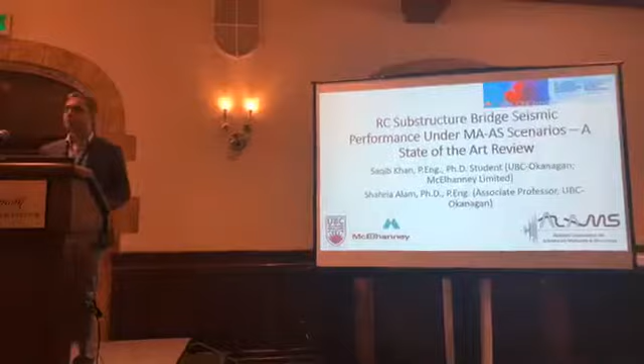Thank you, Dr. Mitchell. My name is Saqib Khan. I'm a PhD student at UBC Okanagan with Dr. Shahria Alam. I'm also the branch manager for McElhanney for Bridges. Dr. Alam is my supervisor, and he's the associate professor at UBC Okanagan.

I'm going to talk a little bit about the effects of main shock, aftershock sequences as they relate to bridges. I'll preface this with a couple of things, because it's a state-of-the-art review, and I had to look at a lot of papers and distill it down. It doesn't carry a lot of detail. I've just tried to stay at a very high level because I only have 15 minutes. So if you are so interested as to look deeply into this, please refer to the paper, and even that will only scratch the surface because I only had 8 pages.

So you really need to go and read more of the papers that are in the reference section. And the other thing is, because of copyright issues, I was not able to put very many figures. So in a way, this is going to be death by PowerPoint, but I've tried to make it as simple as possible. So stay with me. I think I'll touch upon a few things.

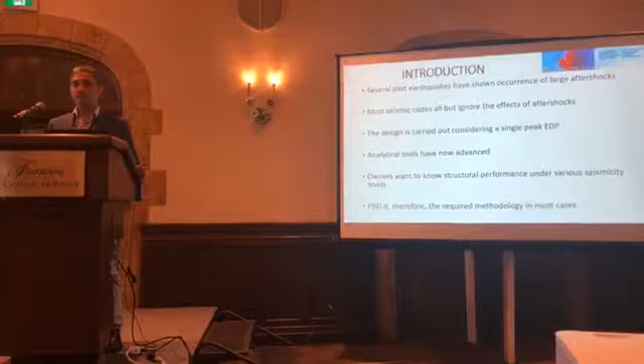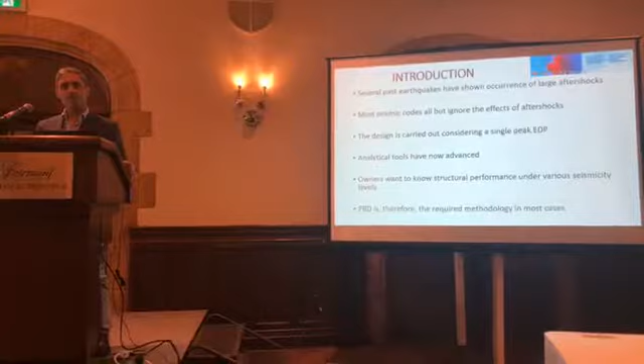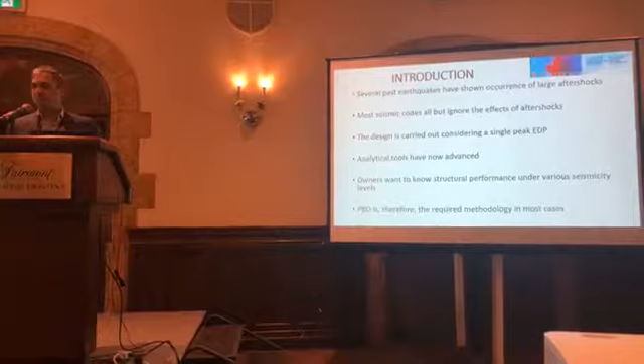Starting here, I think the one thing we all realize is several past earthquakes have had big aftershocks. I think if you were in the keynote, you would have heard about Christchurch and how many aftershocks there were, and it was actually the 6.3 that happened later that brought about a lot of the damage. What happens with most of our seismic codes is they simply ignore the effects of aftershocks, and what we're really doing is designing considering a single peak engineering demand parameter such as spectral acceleration. So that's a bit of a shortcoming.

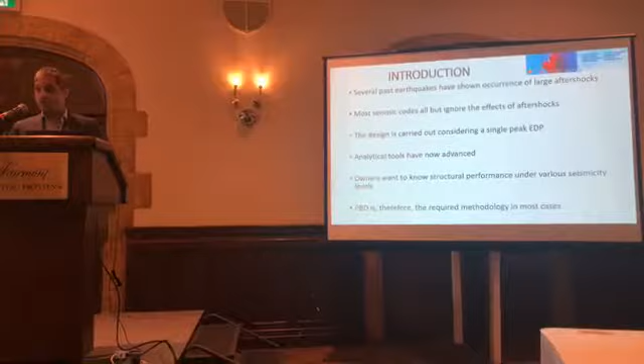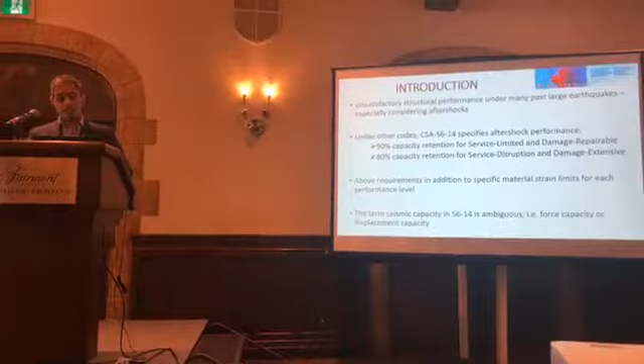However, what's happened is our analytical tools have advanced. Owners now want to know how their structure is going to behave under a single event or multiple events. We do have the performance-based design methodology, which lends itself quite nicely to be able to come up with the performance of a structure, whether it's a single earthquake or multiple earthquakes. So we've had unsatisfactory performance in the large earthquakes in the past.

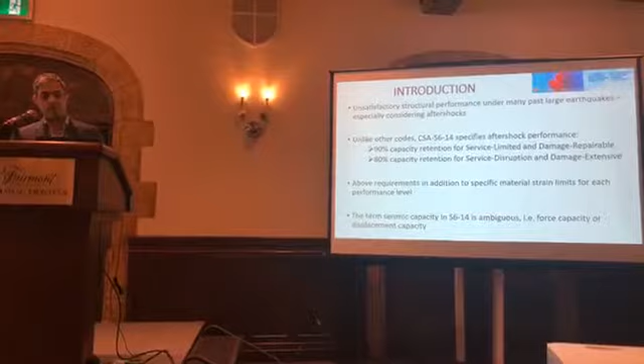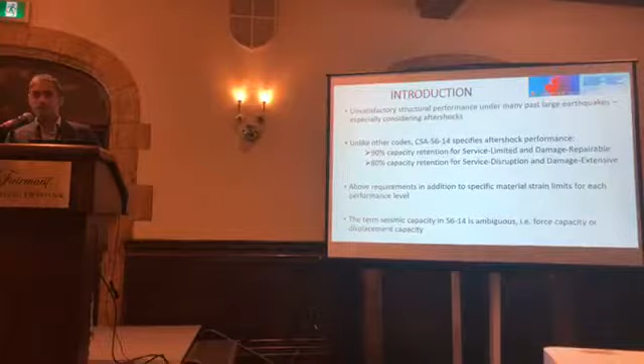S6-14, which is the current Canadian code, does give us a little bit of a flavor as to what it requires for aftershock performance. It basically wants us to retain 90% of the capacity of the structure for limited service and repairable damage performance levels, and 80% for service disruption and extensive damage performance levels. So these requirements are in addition to the material strains for each performance.

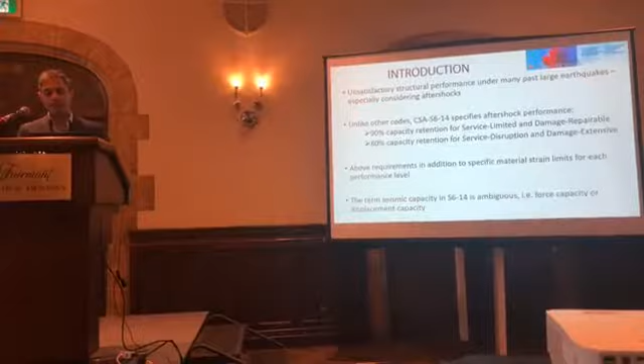The problem is the term seismic capacity is quite ambiguous. Are we talking about force capacity? Are we talking about displacement capacity? A reduction in strength? A reduction in stiffness? What is it that we're trying to retain 90% of or 60% of?

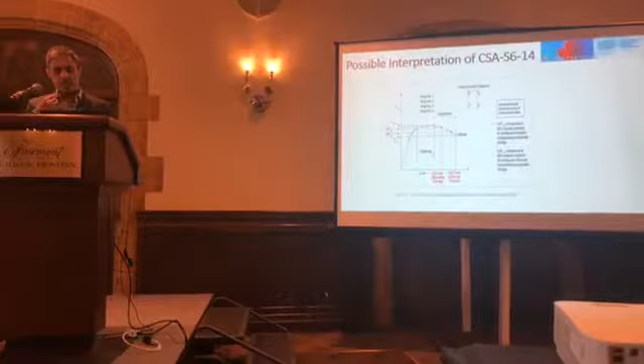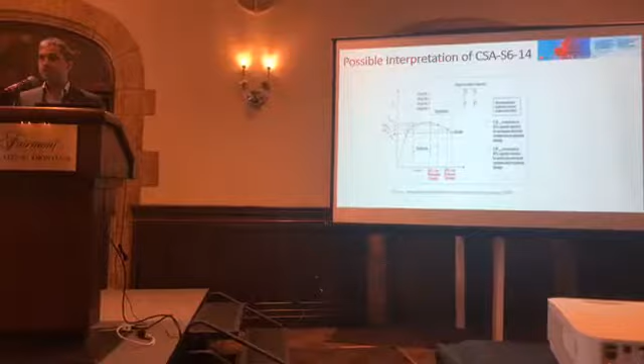That's a bit tricky. So we authored a document for the engineers and geoscientists of British Columbia, which is best practice for doing performance-based design in BC. It's been adopted, and this is one of the possible interpretations that we came up with as part of that. And because I was involved in this work, so I have this picture.

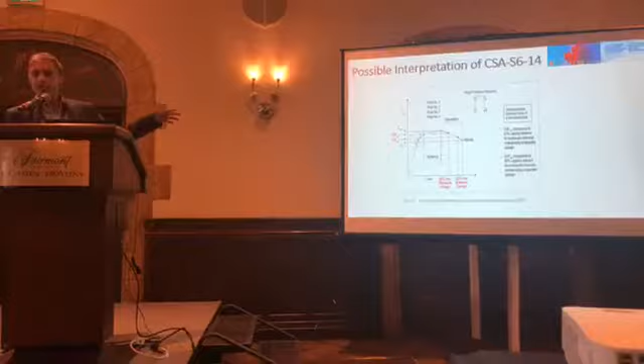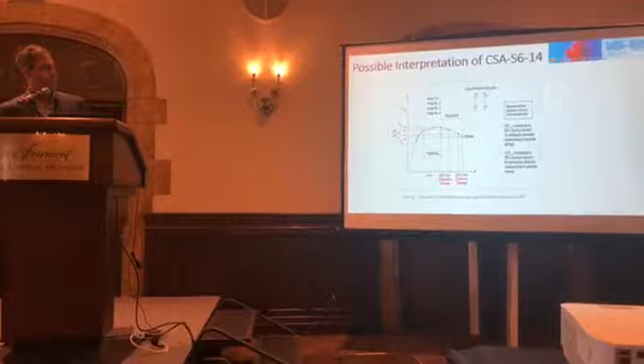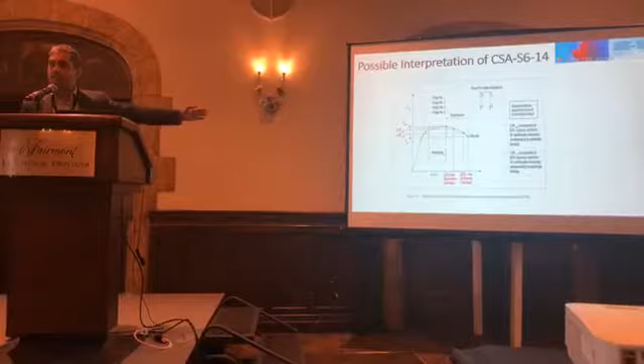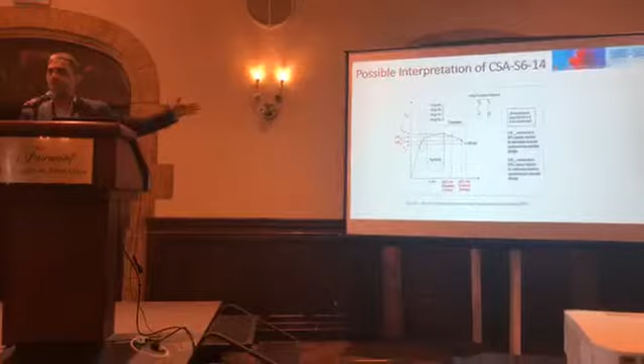So it's basically looking at a notional pushover analysis, accounting for strength degradation, and you basically have a drop off in your force demand, and you can map your displacement on there and see where that displacement occurs when you have 90% of the capacity left or 60% of the capacity left. So that in essence becomes your displacement capacity for each one of those performance points. That's going to be in addition to whatever displacement capacities you get corresponding to the strain values that are in the code. And either those or these points will govern depending on whichever occurs first.

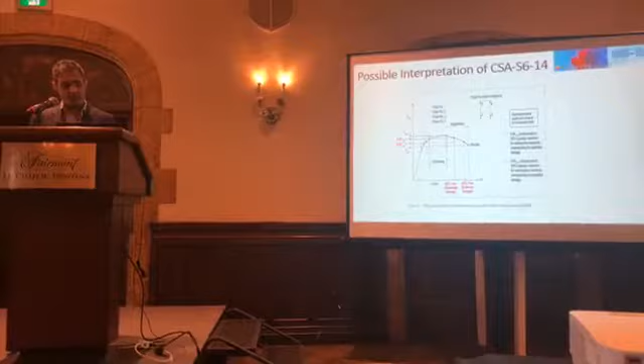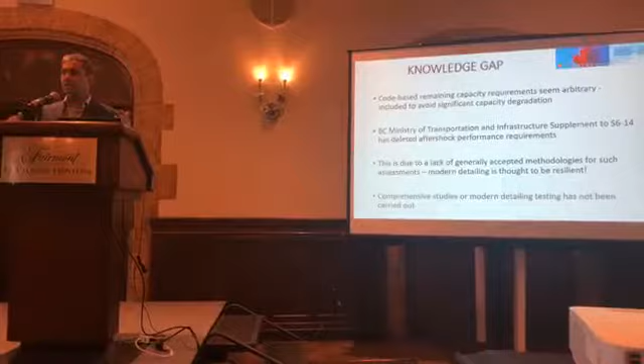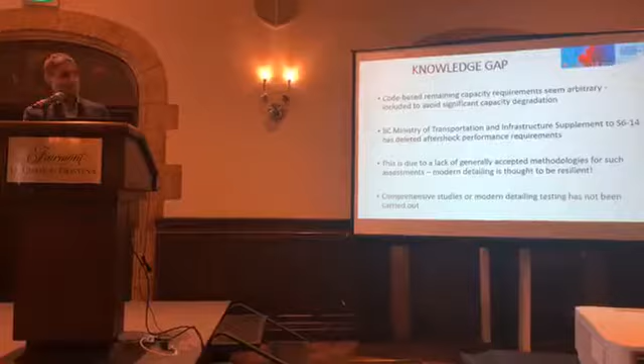So the whole idea here, even though these seem arbitrary, was to basically have some way of keeping some capacity in your system. You don't want to push it so far that an aftershock comes along and the thing goes boom. So the whole idea is to retain some capacity. However, it's ambiguous. We then looked at the S6-14 supplement for the Ministry of Transportation.

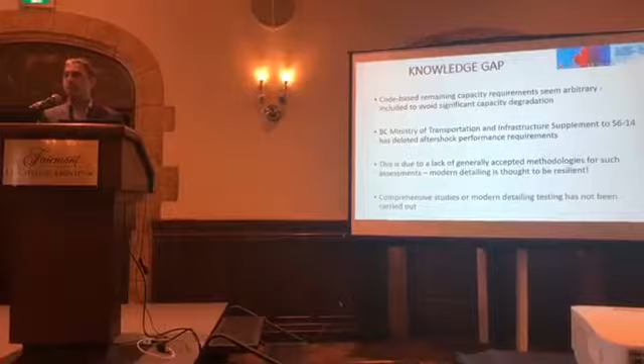I was involved with that a little bit, and we decided to get rid of that whole thing, simply because there are no agreed upon methodologies at this point.

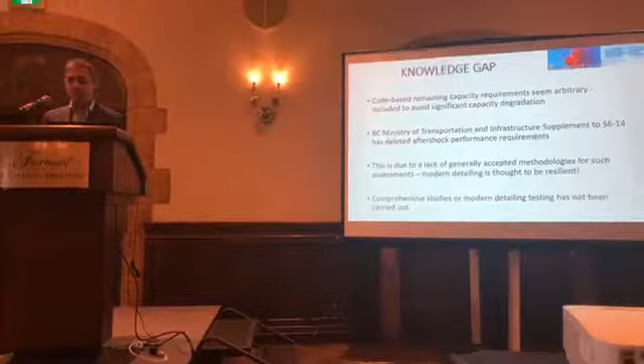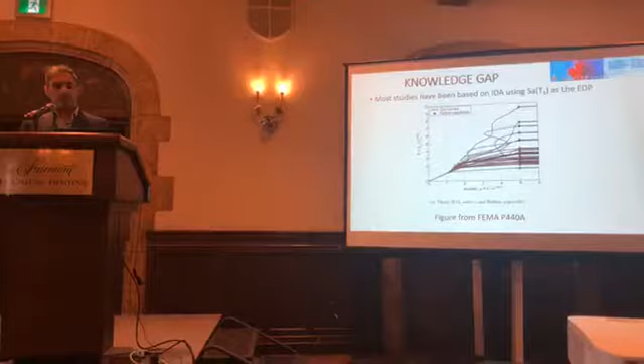We need some comprehensive studies or modern detailing testing to come up with some recipes, some ideas as to how to do this. If you look at a lot of the studies that have happened in the past, they're based on incremental dynamic analysis, which ties to the spectral acceleration at the first period of your structure.

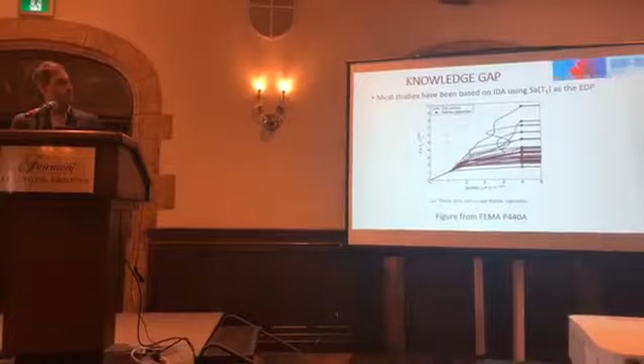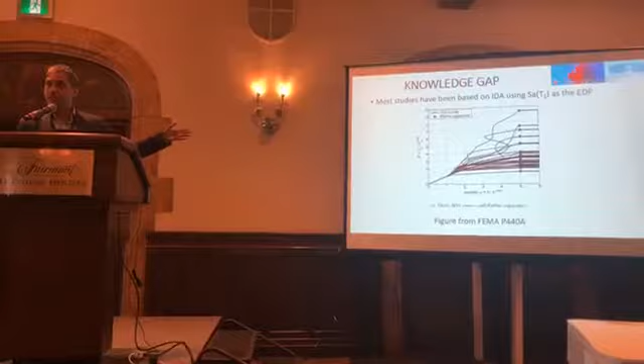But if you look at this, it's predicting the performance. This is like a dynamic pushover analysis. So you have 30 suites that are scaled to the same spectral acceleration. That's why you see at a ductility of 1, they're all the same. But as you keep scaling them up, you get a very wide range of performance.

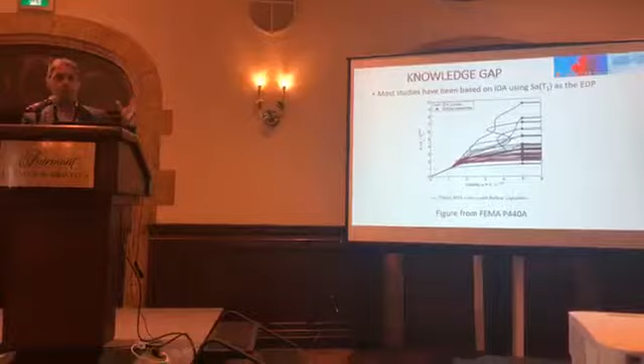So things have been tied to the spectral acceleration, and it seems with this sort of a spread that it may not be the best engineering demand parameter. There may be other parameters that one might want to look at.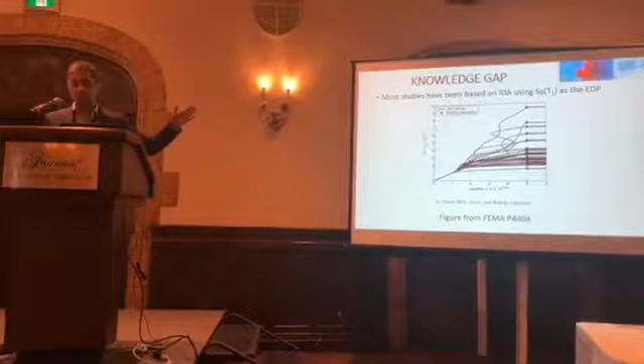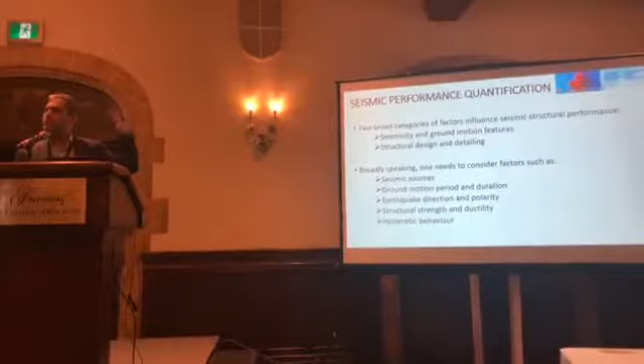So what happens when we look at the seismic performance quantification is you need to look at two broad categories: the ground motion features, which is the seismicity side, and the structural system, so the structural design and detail.

And we need to consider these sort of factors: the seismic sources, the ground period and duration, direction and polarity of your earthquake and your aftershocks. And then, of course, the structural strength and ductility, which is also tied very closely to the hysteretic behavior that a structure might possess.

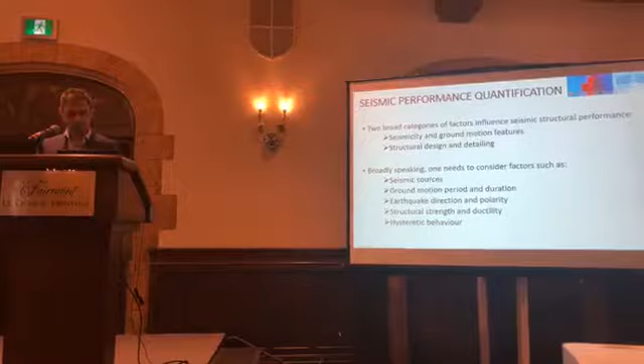So I'm going to go through these one by one and just give you a very high-level flavor of what I've seen is out there. And I will also say at this point that most of the studies are building-based. There are very, very few at this point that are bridge-based.

So this study by Tesfamariam and Goda found that the structural collapse potential varies significantly from different sources. And we know that we have three different sources, at least in British Columbia: the crustal, the subcrustal or in-slab, and also the subduction earthquakes. I think Dr. Ventura is going to talk about that tomorrow.

So the longer period structures were found to have little impact from aftershocks. And I will say that this was a limited study. It looked at 2, 4, 8, and 12-story non-ductile frames. So please don't think of this as an end-all, be-all. This is just one data point.

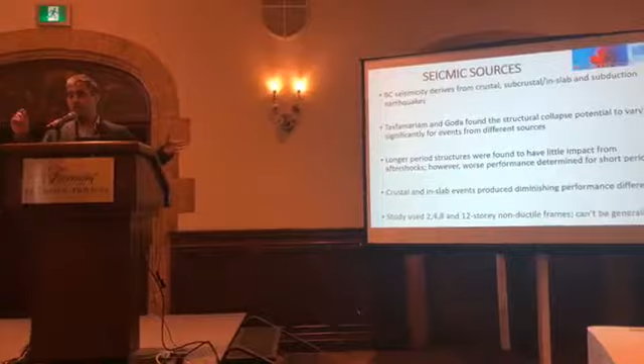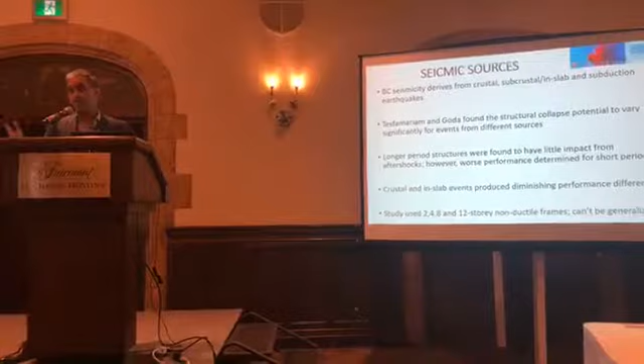The crustal and in-slab events produce diminishing performance differences. So as you put in aftershocks, you didn't see much of a difference for the longer period events for these types of sources. The shorter period, the 2-story buildings were showing worsening of performance.

Ruiz-Garcia analyzed several main shock aftershock sequences, including Christchurch and lots of recorded time histories from NGA West, as well as the Mexican database of strong motions. Predominant ground period, which is really an indication of the frequency content of the earthquake, was found to be consistently longer for main shocks,

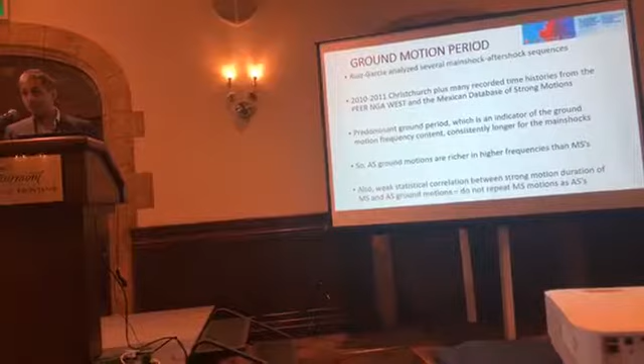which means that the aftershock ground motions are way more rich in high frequencies than main shocks. So that was a big takeaway. And he also found weak statistical correlation between strong motion duration of main shocks and aftershocks.

Now you see a lot of studies just use the main shock as the aftershock. So you're just running the big event with the same frequency content, with the same duration, and a lot of people just use that. This was basically showing that's probably not the best way to go, to just repeat the main shock as the aftershock. We can do better than that.

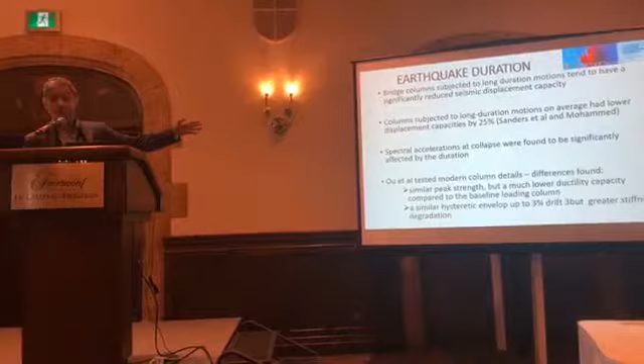We also found that bridge columns that are subjected to long duration motions tend to have significantly reduced displacement capacities. There are studies that have seen that when you subject a column to a high duration event versus a low duration event, your ultimate displacement capacities may reduce by as much as 25%.

And also, if you look at spectral accelerations at collapse, they were found to be significantly lower.

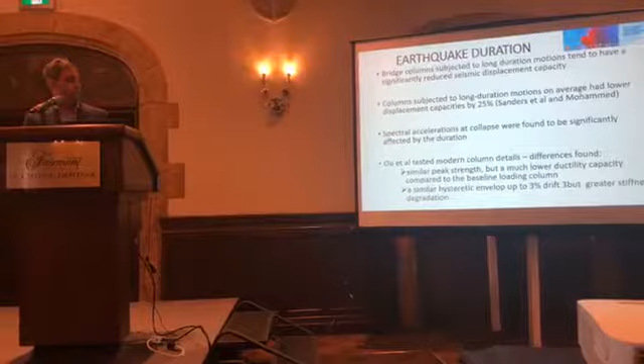There's a study by Ou and others, and they found similar peak strength, but much lower ductility capacity. They took two different columns, a baseline column with a shorter duration protocol, and tested a longer duration protocol, and found that the peak strength was similar, but the ductility reduced quite a bit.

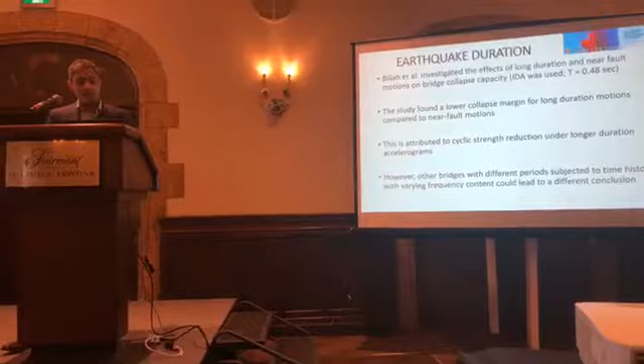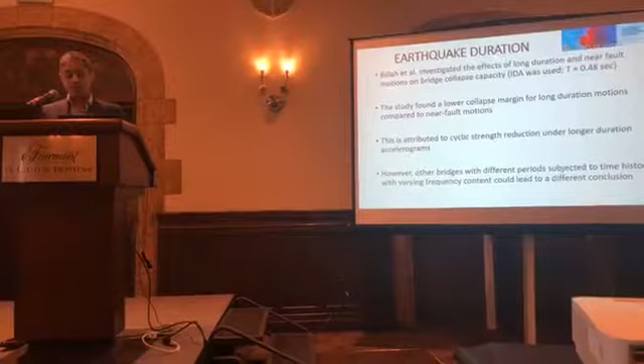So Billah and Dr. Alam, I think, and others, they investigated the effects of long duration and near-fault motions. They used the IDA. This particular example had about 0.48 seconds for the period. They found a lower collapse margin for long duration motions compared to near-fault, and again, this is one study.

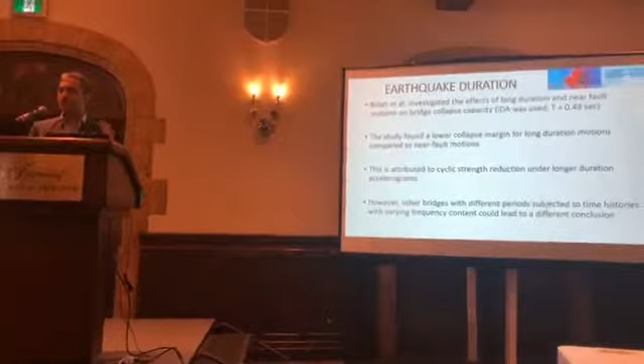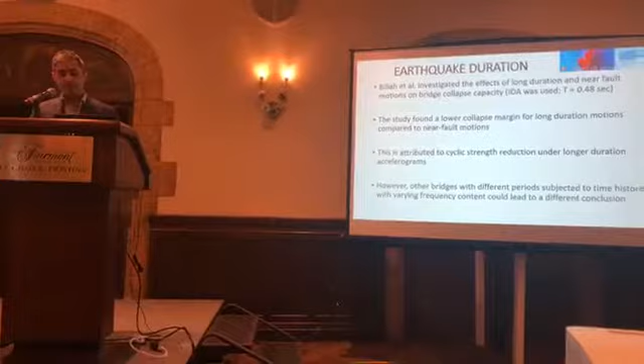I don't want the audience to think you can make generalizations out of these. These are data points that make us wiser and bring us more knowledge, but this doesn't cover the whole range of things. If you were to do the same thing with different periods and different time histories with different frequency content, you will probably find different conclusions. We know the frequency content is different, so there may be situations when the aftershocks are rich in frequency bands that match the damaged structural period, and then you can have a lot more damage in aftershocks. So we need to do more investigations there.

The other thing is the main shock direction and the aftershock polarity. Polarity is really just an inherent bias. If you have an irregular structure and an earthquake happens and it ratchets and goes in a certain direction, now the aftershock comes along with a bias of pushing it in the same direction, you're going to get more damage. Something with the opposite polarity has been seen to recenter your bridge, your structure, so it could go either way. The takeaway is that you need to be aware of polarity as well.

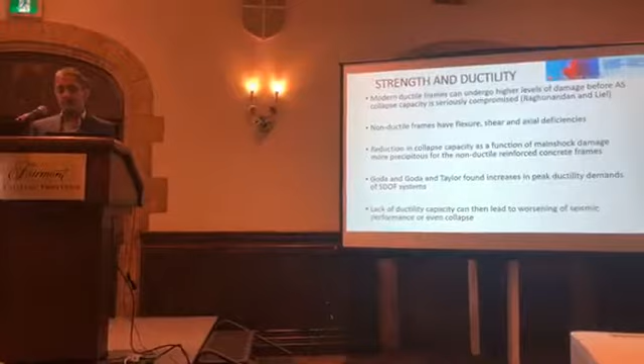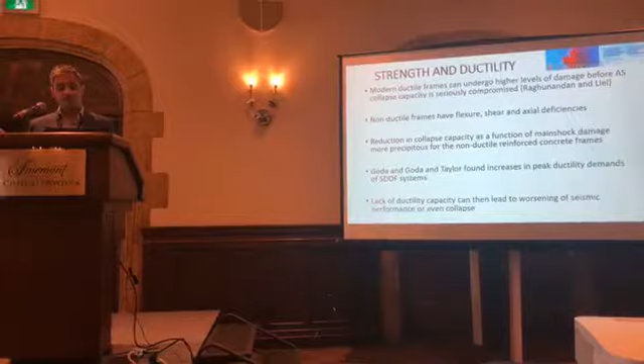Of course, the modern ductile frames are able to undergo higher levels of damage before the aftershock collapse capacity kicks in. The issue with non-ductile frames is not just flexure deficiencies, they have axial and shear deficiencies too, so those become quite important. The reduction in collapse capacity as a function of main shock damage is more precipitous - you get there faster for non-ductile reinforced concrete frames, so be mindful of that.

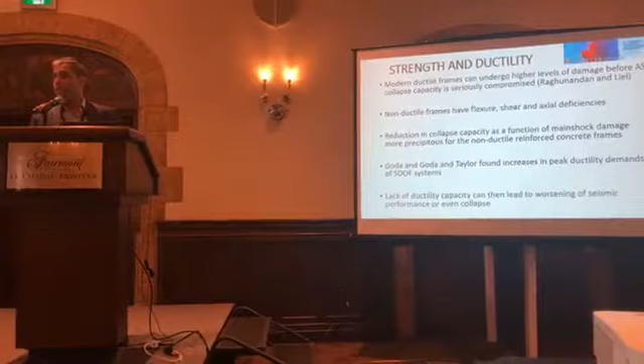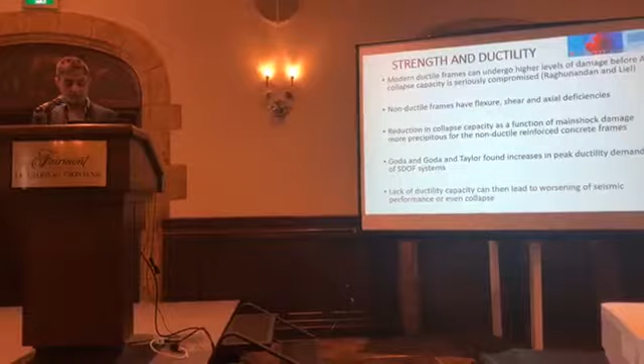The badly detailed columns for bridges, they're at much more risk. We've seen increases in peak ductility demands for single degree of freedom systems, which means that if you have less ductility capacity, you're going to run into issues with aftershocks kicking in.

Hysteretic behavior really indicates that strength degradation relates to maximum displacement and energy dissipation. This was a study again done by Ou and others. So when you look at the hysteretic behavior, strength degradation really relates to how far you're pushing your system and how much energy it's able to dissipate. Stiffness degradation is also found to be related to energy dissipation, but pinching behavior is more a function of the maximum displacement, and that's on high shear columns, that's where pinching kicks in.

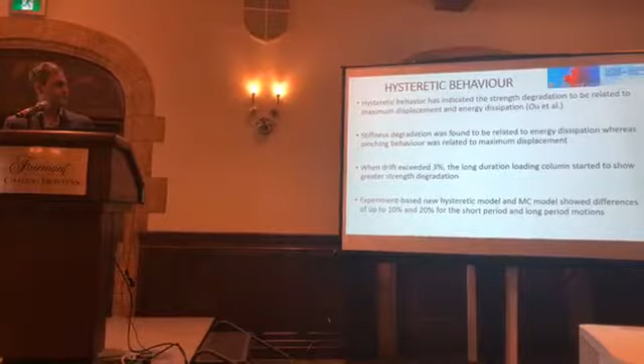What was found was that when drift exceeded 3%, the long duration loading columns versus a shorter duration protocol or earthquake showed greater strength degradation.

In this study, they did some experimental evaluation, and they came up with a new hysteretic model to basically predict the behavior. A comparison was made between that model and the modified Clough model, and it was shown that if you use two different hysteretic models, you were getting differences of up to 10 to 20%, depending on whether you had short period motions or long period motions. Just keep that in mind, that when we're modeling these structures, modeling our plastic hinges, the hysteretic model that we use is quite important, because 20% is quite a significant difference.

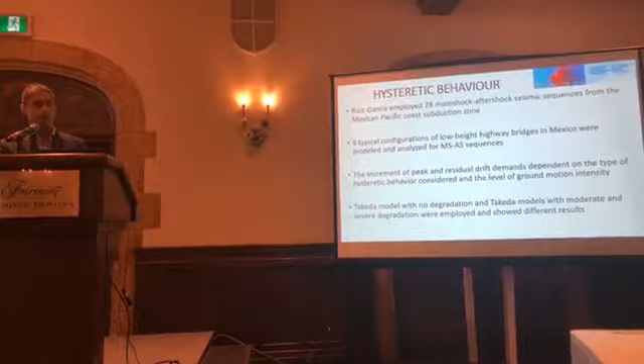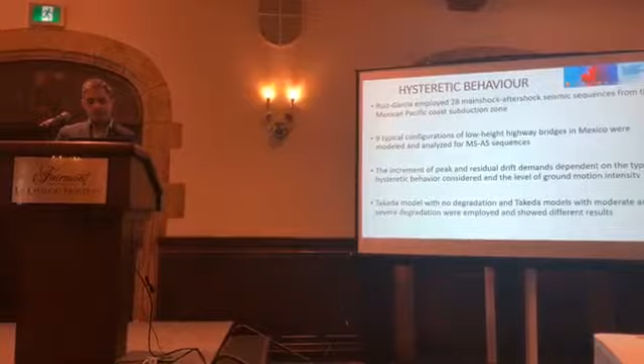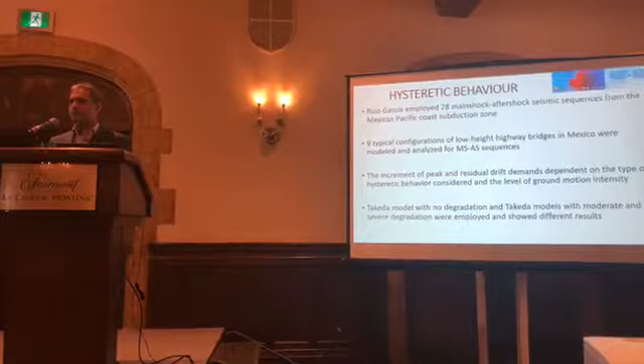Ruiz-Garcia, in a different study, employed about 28 main shock aftershock seismic sequences, and he used these from the Mexican Pacific Coast subduction zone. These were used to look at low-height highway bridges in Mexico. They didn't experience significant lateral peak and residual drift demands when using the as-recorded earthquakes, because the spectral accelerations and demands were on the low side. However, what they did was increment the demand - they basically scaled it up just to see how the system would respond.

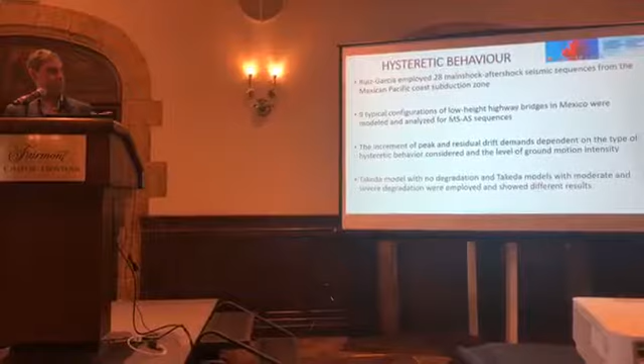It was found that the increment of peak and residual drift demands was dependent on the type of hysteretic behavior considered and the level of ground motion intensity. So as you ratcheted it up, you got worsening of the performance. This study basically used the Takeda model with no degradation, and then the Takeda model with moderate and severe degradation, and found different results. So again, that shows us it's quite important.

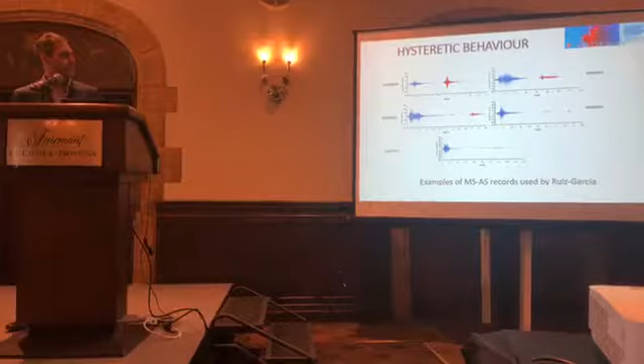This is just one thing I did take from the paper. It's just showing some main shock aftershock sequences. There are now large databases where you can pick out a lot of main shock aftershock sequences, the KNet and KiK-net from Japan, the NGA West. You have lots of sources if you want to look into this stuff.

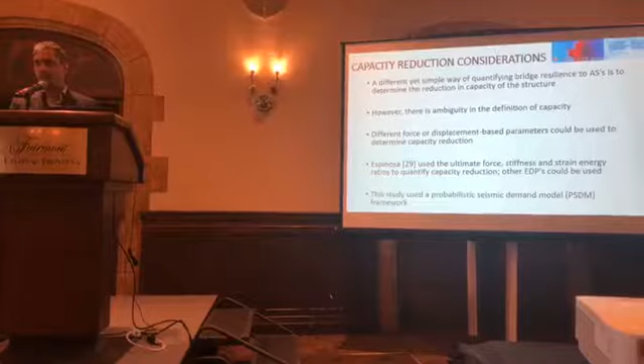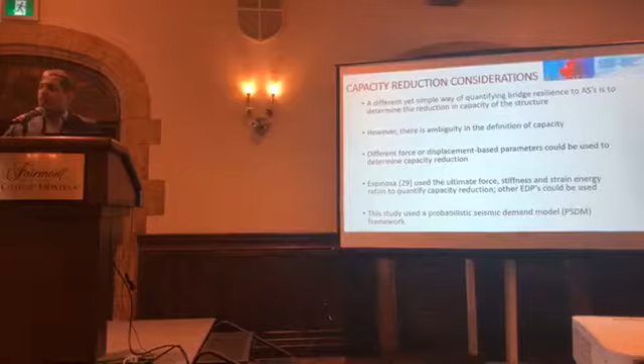Towards the end, I want to go back to this whole capacity reduction consideration issue. It's a simple way to see how resilient your bridges are to aftershocks and to determine the reduction in capacity of the structure. Again, there is an ambiguity, since there are different engineering demand parameters that one could use.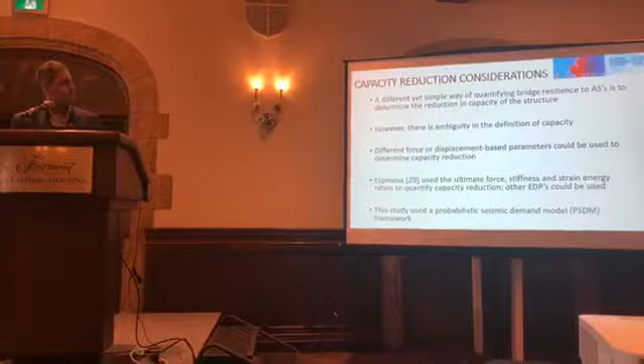Espinosa did his master's, and this comes from his master's work. He used three different parameters: basically the ultimate force, the stiffness, and strain energy ratios, to quantify capacity reduction. One could use other engineering demand parameters—there are lots of them out there.

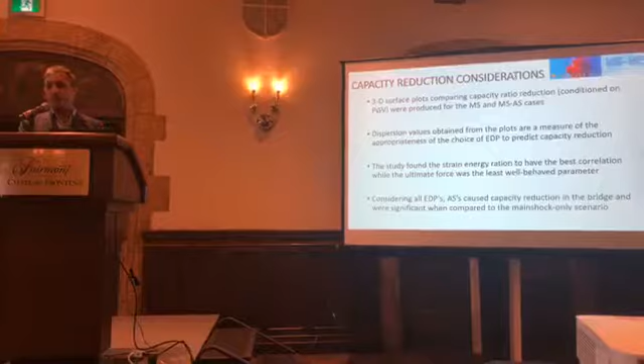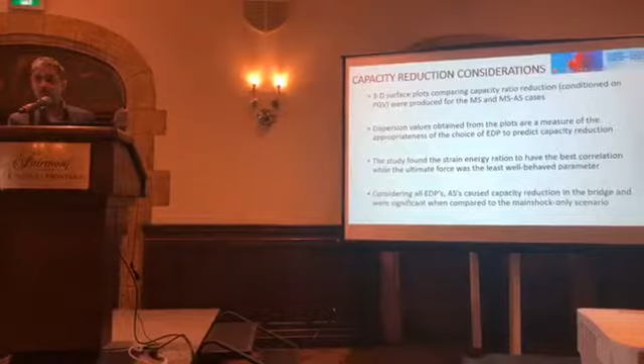This used a probabilistic seismic demand model framework, and eventually produced some 3D surface plots comparing the capacity reduction ratio. It was conditioned on the peak ground velocity, and produced for both the main shock and the main shock aftershock sequences, so you can see how things change when you look at just the main shock versus the main shock plus aftershock.

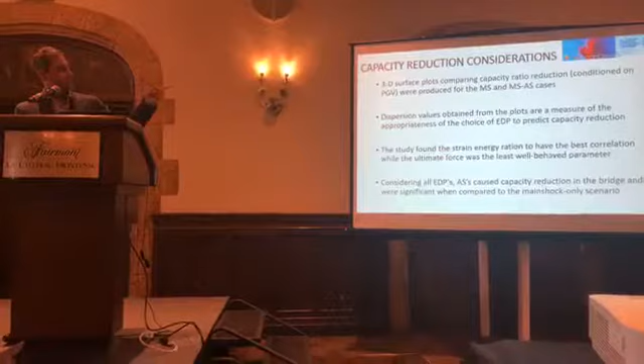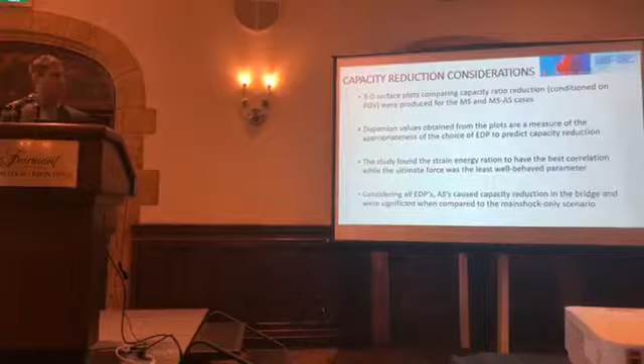Through this, some dispersion values were obtained, and the lesser the dispersion, the more stable and robust you can think the engineering demand parameter to be, and therefore perhaps more reliable. So the best correlation in this study was found to be strain energy.

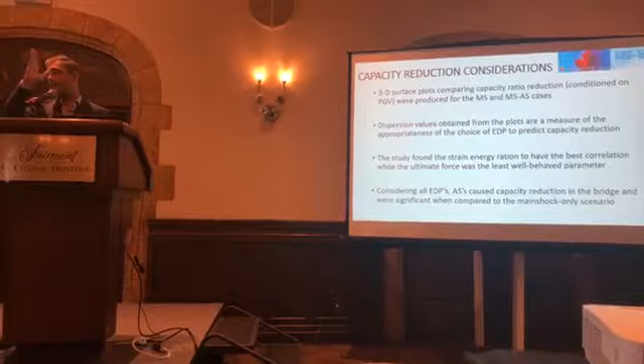So if you were to do a pushover analysis and you have a force-displacement curve, it's really the energy—the area under the graph—that is your strain energy. It's a measure of your capacity.

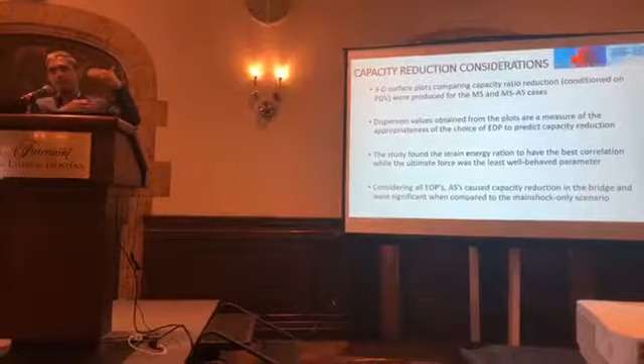So you run a pushover for the virgin bridge, and then you run the pushover for a bridge that's been damaged, and then you do some nonlinear time history analysis to look at your demands, and you can correlate them.

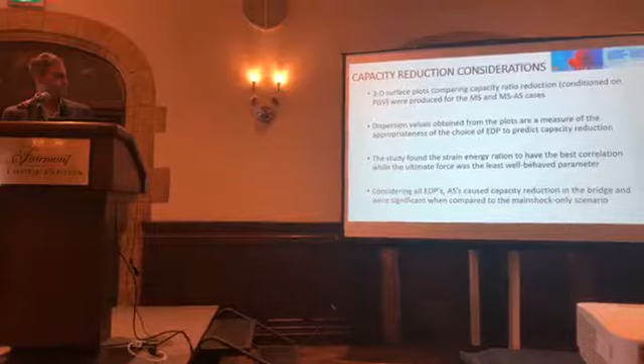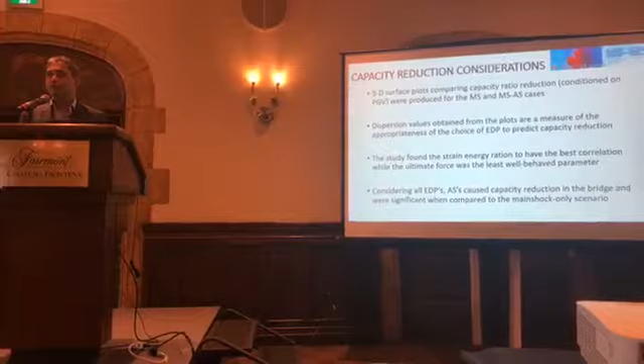The least well-behaved parameter was the ultimate force, which tells us that's not such a good thing to use. Forces, we know, are not a good indication when it comes to seismic design. Displacements and energy are a lot better.

Considering all EDPs though, aftershocks showed worsening of demand.

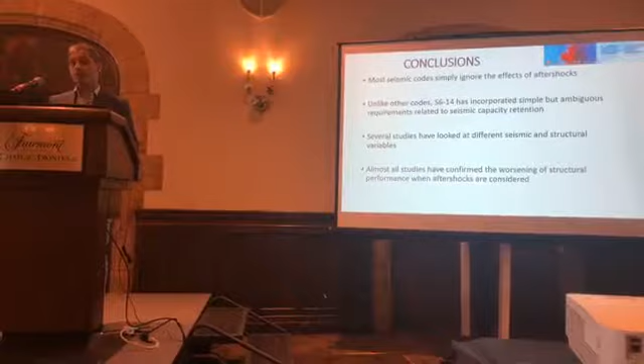I'll conclude very simply here. Most seismic codes simply end up ignoring the effects of aftershocks, which is perhaps not the best thing. Unlike other codes, S6-14 have incorporated some simple stuff, but it's ambiguous. It's been made a bit more ambiguous to my mind in S6-19, I think, only because the 80%, 90% criteria has been taken out, though it's still there in spirit. In a way, it's better, because it's not prescriptive, so we have to think about it.

Several studies have looked at different seismic and structural variables, and almost all of them have confirmed worsening of performance when we look at aftershocks. We do have some knowledge about the different parameters and how they affect bridge performance.

However, there is a need to unify the approaches and carry out a comprehensive study, or set of studies, that looks at the effects of different variables in a holistic manner. Because we've looked at different things, but nobody's really combined them together to come up with a workable framework.

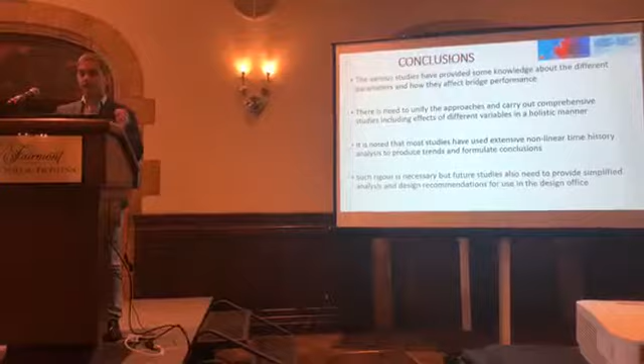It's great that most of these studies have used nonlinear time history analysis, and that sort of rigor is needed because this is a complicated issue. We need to do that.

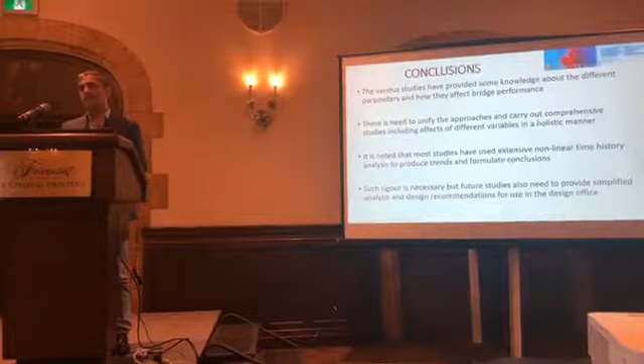However, if we need to advance the state of practice, we have to realize that once all of this is done in a lot of depth, somebody has to come up with simplified procedures to perhaps get these things into the code, and they have to be simplified enough that they can be used in design.